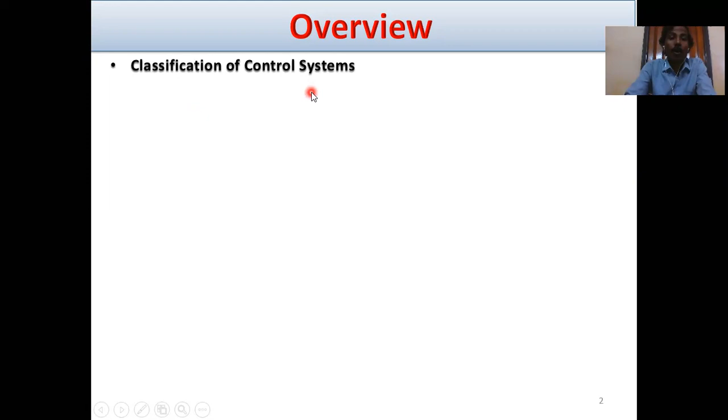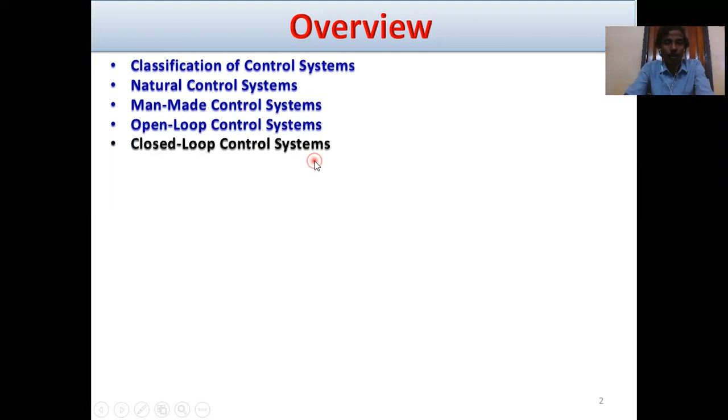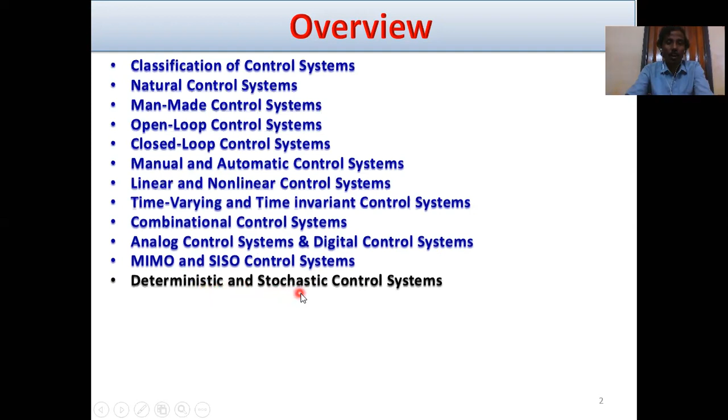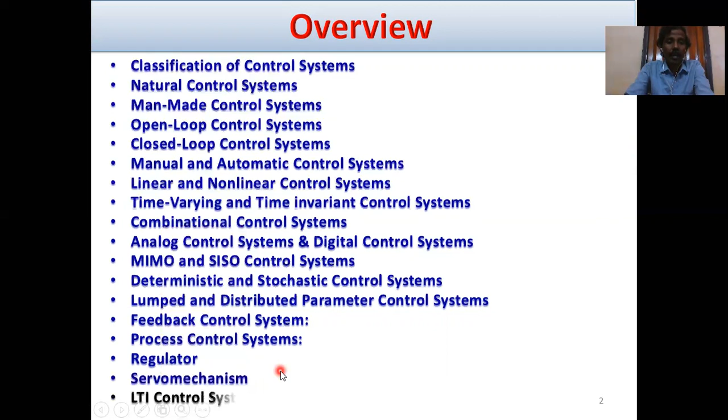Overview: classification of control systems includes natural control systems, man-made control systems, open loop control systems, closed loop control systems, manual and automatic control systems, linear and non-linear control systems, time varying and time invariant control systems, combinational control systems, analog and digital control systems, MIMO and SISO control systems (multi-input multi-output and single input single output), deterministic and stochastic control systems, lumped and distributed parameters control systems, feedback control systems, process control systems, regulator control systems, servomechanism, and LTI control systems. LTI control systems are very important.

This is our overview. Next, classification of control systems. What is the classification? Control systems are mainly two types: number one, open loop control systems, and number two, closed loop control systems.

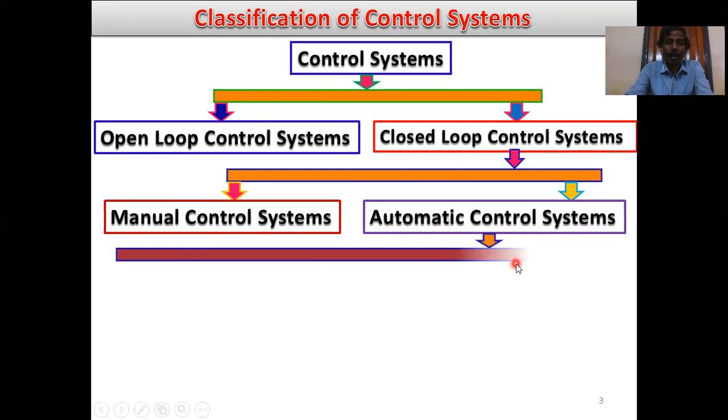Closed loop control systems are also two types: manual control systems and automatic control systems. Automatic control systems again include pneumatic control systems, electrical control systems, electronic control systems, electro-pneumatic control systems, and hydraulic control systems.

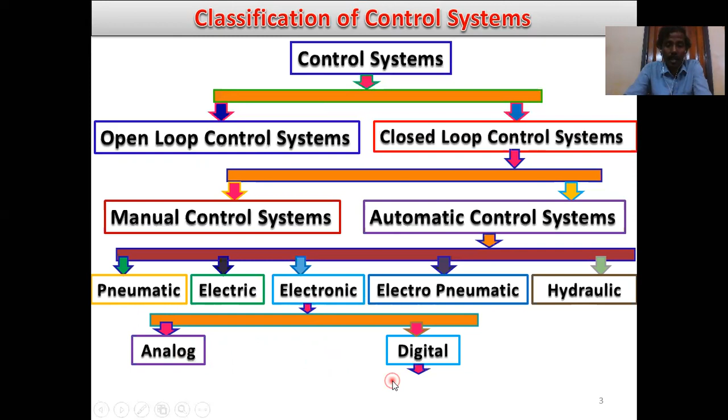Next, electronic control systems are again two types: analog control systems and digital control systems. Digital control systems include microprocessor based control systems, PLC based control systems (programmable logic control based control systems), DDC based control systems, DCS based control systems, and fuzzy logic based control systems.

So what is DDC? DDC means direct digital control. And DCS means distributed control systems.

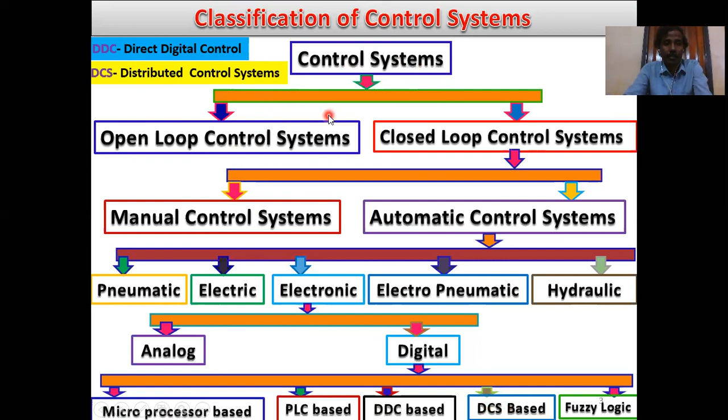So this is our classification of control systems, the first classification. And second classification of control system, that means another classification of control systems.

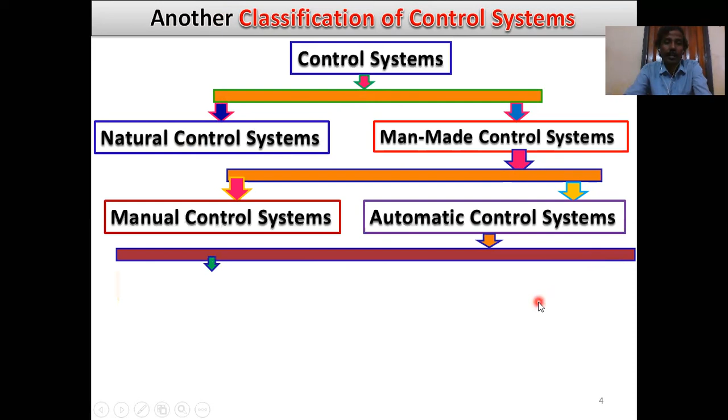Control systems are again two types: natural control systems and man-made control systems. Man-made control systems are again manual control systems and automatic control systems. Automatic control systems are again open loop control systems and closed loop control systems.

Open loop control systems are again two types: nonlinear control systems and linear control systems. Closed loop control systems are also two types: nonlinear control systems and linear control systems. Nonlinear control systems are also two types: time variant control systems and time invariant control systems. Linear control systems are also two types: time variant control systems and time invariant control systems.

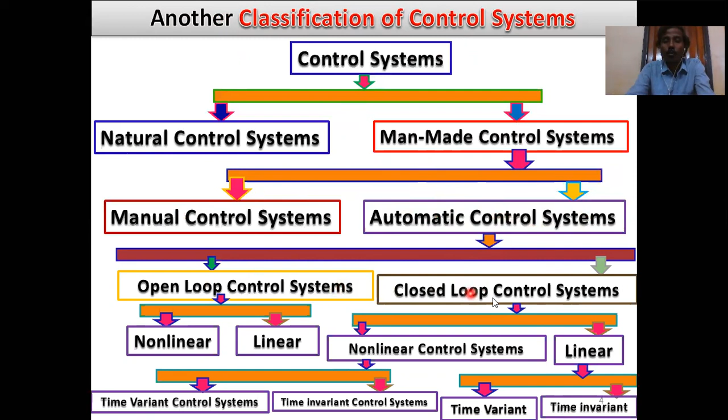This is important: natural control systems and man-made control systems, and automatic control systems. This is also very important. Automatic control systems are also open loop control systems and closed loop control systems, or feedback control systems.

So classification of control systems. Another classification of control systems based on some parameters - we can classify the control system in the following ways.

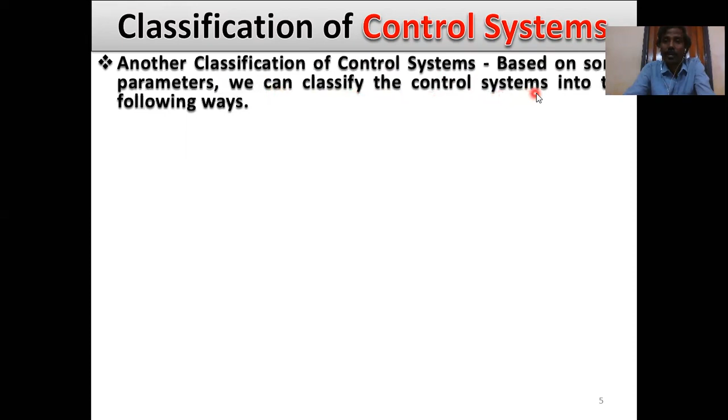What is natural control systems? The systems inside a human being or biological systems are known as natural control systems. This is a very important term - human being or biological systems. This type of control system is called natural control systems. Examples of this kind of control systems are universe control systems and human body control systems.

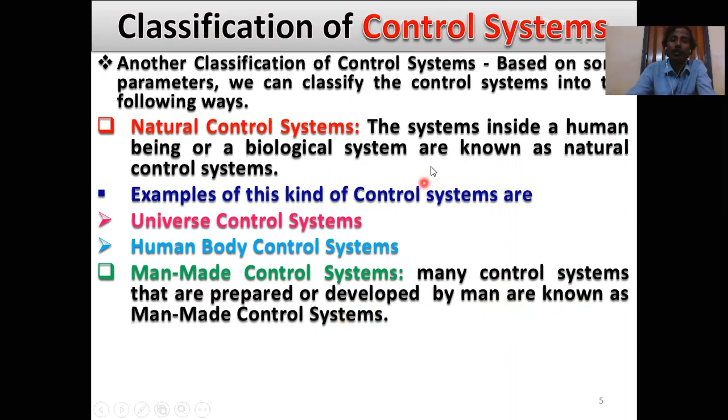Another type, man-made control systems. Many control systems that are prepared or developed by man are known as man-made control systems. This is developed by man - that's why this type of control system is called man-made control systems. This is very important, and examples of these control systems are vehicle type control systems and aeroplane control systems, etc.

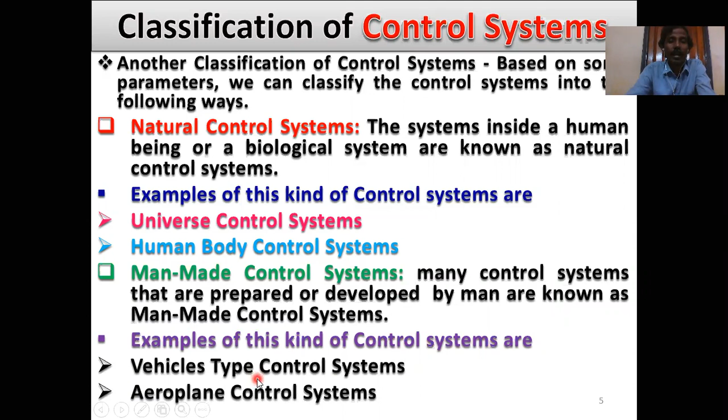So natural control systems and man-made control systems. Again, what is open loop control systems? Open loop means no feedback path, just input corresponding to output. So what is open loop control systems?

The control technique in which the calculated or estimated amount of energy is supplied to a process plant according to the practical experience of an operator, in order to maintain a process variable at the desired value, without receiving any feedback information about the actual value of the variable in the process plant. This is without receiving any feedback information - this is very important, without feedback. That's why this type of control system is called open loop control systems.

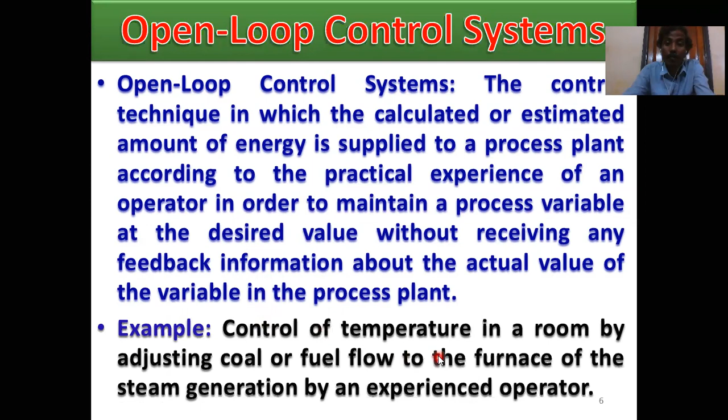What is the example of open loop control systems? Control of temperature in a room - this is the example of an open loop control system, by adjusting coal or fuel flow to the furnace of the steam generation by an experienced operator. So this is our example: room temperature by experienced operator, using coal and fuel flow.

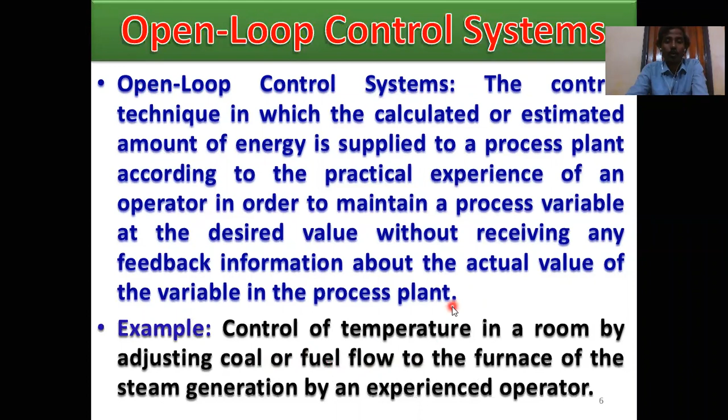Next, the block diagram for open loop control systems. First block: coal supplied by the experienced operator according to deviation of room temperature from the desired value. So coal supplied by experienced operator - this is also very important, because in this case there is no feedback, only ideally coal supplied by an experienced operator. Suppose our required room temperature is 25 degrees centigrade - the experienced operator supplies the coal for 25 degrees centigrade.

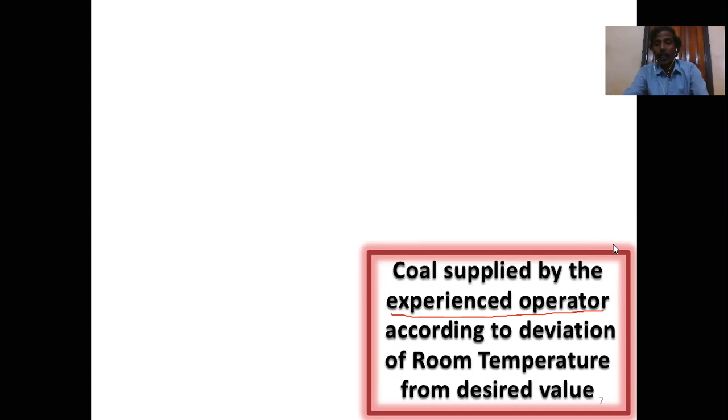Next block, furnace or heating systems. Coal burns and boils the water in the boiler drum. This is the boiler section, controlled by water, and storage steam unit. Then steam flow to the room, our required room temperature, suppose 25 degrees centigrade. So this room is being heated, but there's no information feedback, so the ultimate temperature could be 25, 24, or 26 degrees centigrade, because there's no feedback in between the input and output section.

No feedback information - that's why this type of control system is called open loop control system. This is the exhaust steam. So the experienced operator supplies the coal, the furnace burns the coal, the boiler produces the steam, this is the steam storage unit, and this steam heats the room. This is the open loop example.

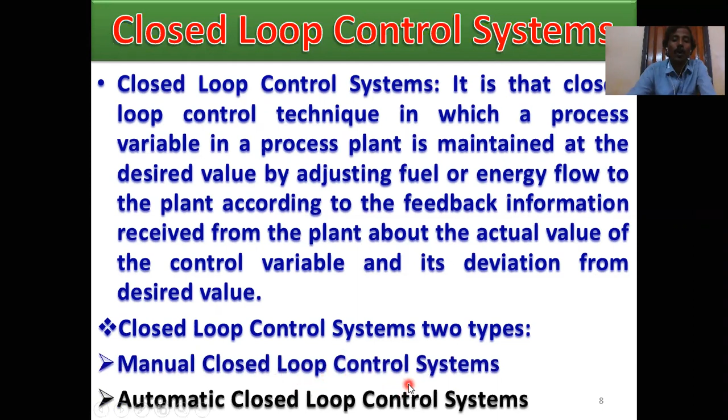So this feedback information is very important, this is required for closed loop systems. This is the feedback information. What is the example? Closed loop control systems are mainly of two types: manual closed loop control systems and automatic closed loop control systems. These are practical examples. What is the block diagram?

This is the reference input or set point. This is comparator, or summing point, or regulator. This is the error signal - error signal equals reference input minus feedback signal, this signal minus this signal. And this is the amplifier.

Amplifier output is controlled by the controller, and controller output signal controls the exact plant or process. This is very important, because the controller section controls the plant. So this signal ultimately controls the process or plant section, and the process output or plant output ultimately is the controlled output signal. This is the feedback path. Feedback may be positive or negative.

So controlled output divided by controlled input is called the efficiency of the system, or transfer function of the system, if all initial conditions are zero. This efficiency is always less than 1. If it's 90% and above, up to 98%, this is a perfect system or high efficiency system. So these are practical examples of closed loop control systems.

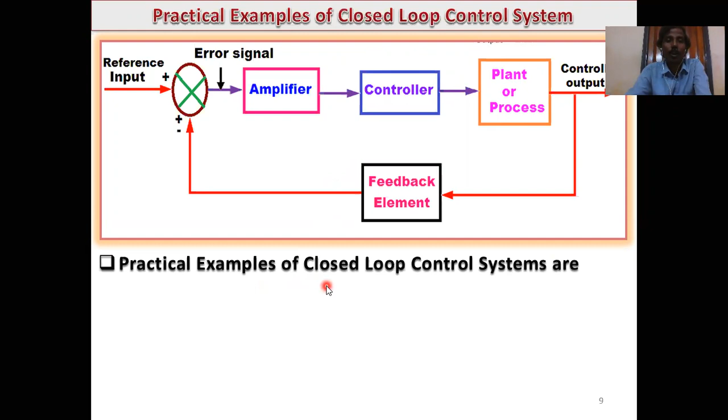What are the practical examples? Automatic electric iron, water level control, servo voltage stabilizer, air conditioner, cooling system in a car, missile launch and auto-tracking by radar. These are our examples of closed loop control systems.

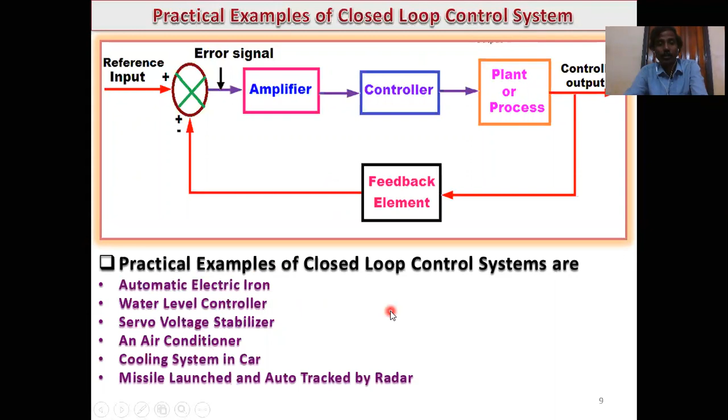Then manual closed loop control systems - what is it? This is also important: it is that closed loop control technique in which a process variable in a process plant is maintained at the desired value by adjusting fuel or energy flow to the plant with the help of an experienced operator, according to the deviation of the process variable from the desired value. So this is controlled by an experienced operator according to the deviation of the process variable - this is the important sentence. That's why this type of control system is called manual closed loop control system.

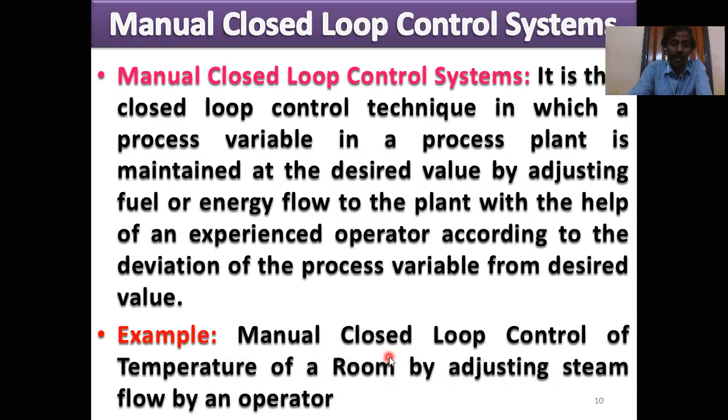So what is the example? Manual closed loop control of temperature of a room by adjusting steam flow by an operator. So room temperature control, this is also a manual closed loop control system. What is the block diagram?

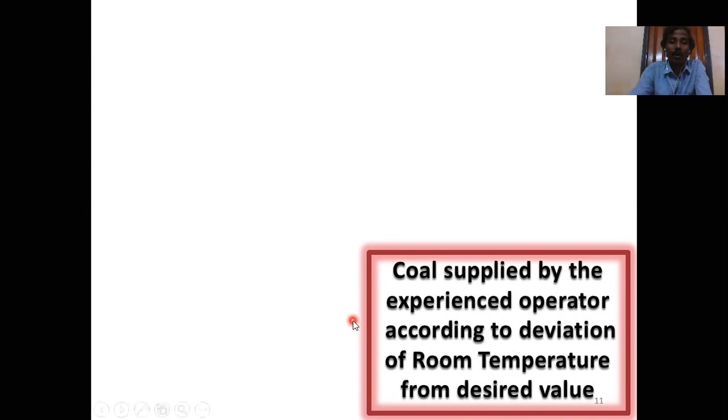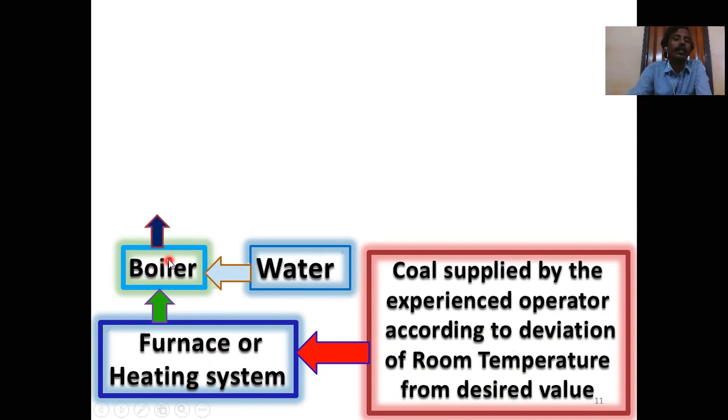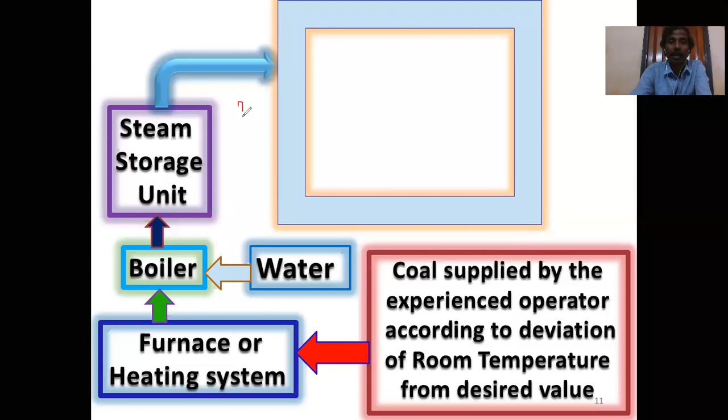Again, this is the first block: coal supplied by the experienced operator according to deviation of room temperature from the desired value. So the experienced operator supplies coal to the furnace and heating system. The coal burns, this is the boiler section controlled by water, and this generates the steam storage unit, which controls the room temperature. This is our room - suppose again our required temperature is 25 degrees centigrade.

Then steam flows, after steam flow the room is being heated, and this temperature may be 25 degrees, or less than 25 degrees, or greater than 25 degrees. So the telephone operator sends information about the actual temperature of the room, and vice versa. This is the exhaust steam section.

So this is our closed loop control system, because the experienced operator supplies the coal, and this coal burns in the furnace, and the boiler section is controlled by water, and this steam storage unit - the steam controls the room, and the room is being heated, and this information is sent by the experienced operator. This is the experienced operator section, and this is the exhaust steam.

This section is exhaust steam. This is the exhaust steam.

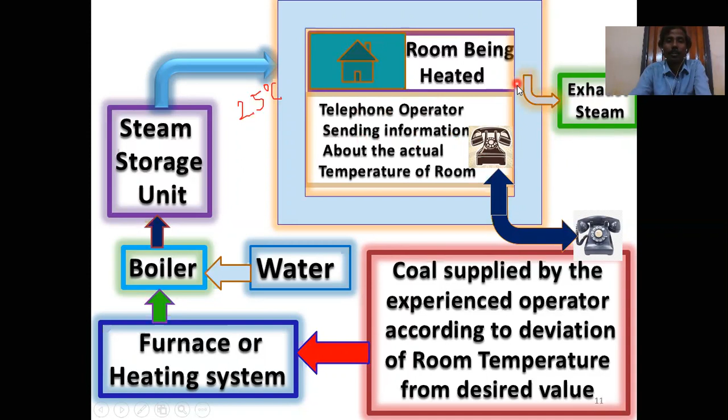So this is our closed loop manual control systems examples.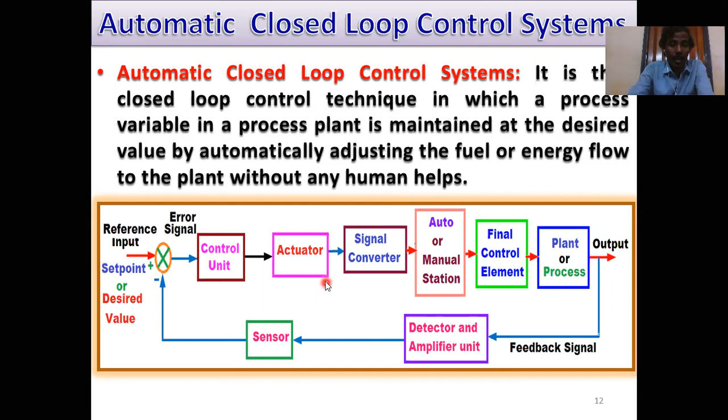So this is the block diagram for automatic closed loop control systems. This is the reference input and set point or desired value. This reference input may be step, ramp, parabolic, impulse, sinusoidal, discrete, analog, any type of input you can apply. And this section is the comparator section or summing point, and this is the error signal. Error signal means reference input minus feedback input. This signal is the input of the control unit, and control unit output signal becomes actuator input signal. Actuator output signal goes to signal converter, and this signal converter is ultimately for automatic control.

This is the auto system. If this is manual, then it's used by or controlled by manual station. So in this section, this is the auto section.

And final control element, this is the final control element. That means this is the exact value for plant or process input magnitude. This is the process or plant, and after operation, this is the output, and this output feeds back, and this feedback goes through signal detector and amplifier unit or sensor. This is the negative feedback system, and output by input is called the efficiency. If transfer function definition, then output by input is called transfer function if all initial conditions are zero. So this is the block diagram representation of automatic closed loop control systems.

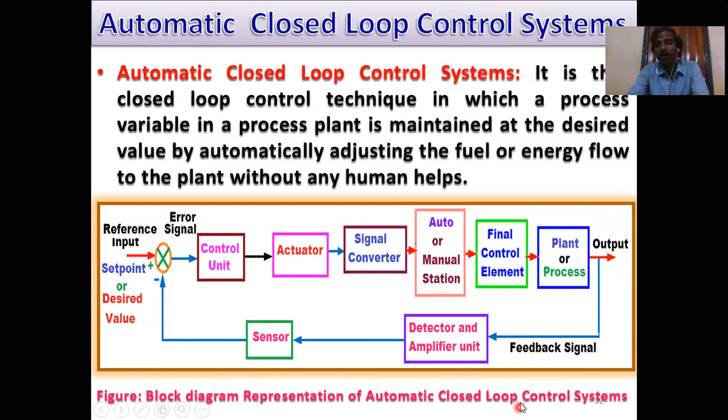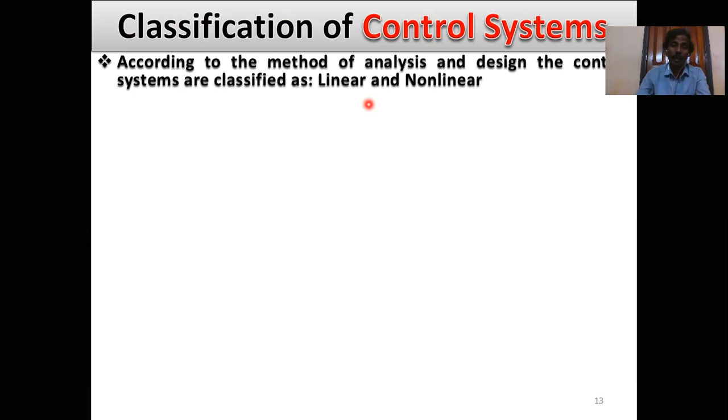Again, according to the method of analysis and design, the control systems are classified as linear and nonlinear control system. This is very important in our life, because what is a linear system or what is a nonlinear system, this basic idea is required for every engineering student.

Linear control systems. What is a linear system? A control system is called linear if it satisfies the additive property as well as homogeneous property. So if it satisfies additive properties and homogeneous properties, then this type of control system is called linear control system.

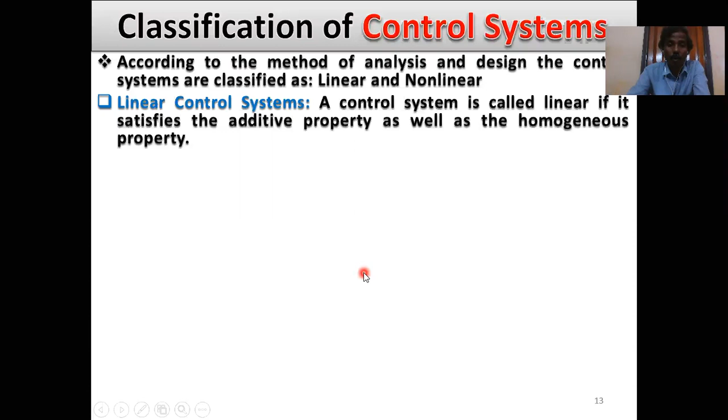So what is additive property? Suppose if x, y, and z be the domain of the function f, function of x plus y plus z, then we can write f(x+y+z) equivalent to or equals to f(x) plus f(y) plus f(z). This is the additive property.

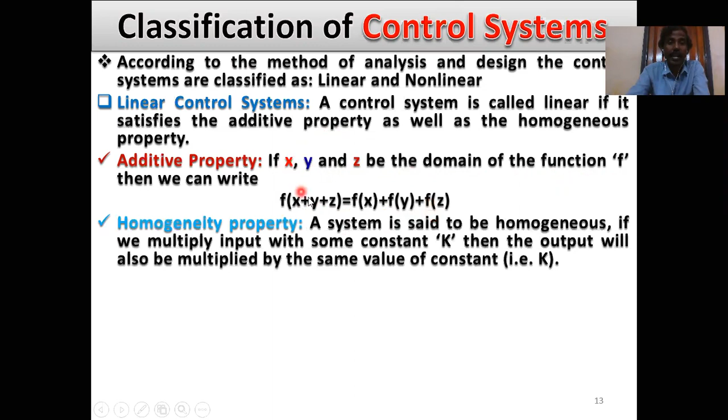And what is the homogeneity property? A system is said to be homogeneous if we multiply input with some constant k, then the output will also be multiplied by the same value of constant k. Suppose f(kx), this k multiplied into x, so the output is k into function of x. This type of property is called homogeneous property.

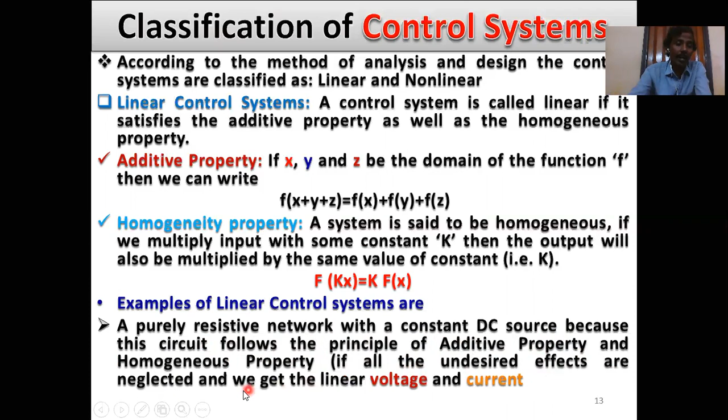Homogeneity property, homogeneous property. Example of linear control systems are a purely resistive network with a constant DC source, because this circuit follows the principle of additive properties and homogeneous properties. If all the undesired effects are neglected, we get the linear voltage and current. So this is the example of linear control systems.

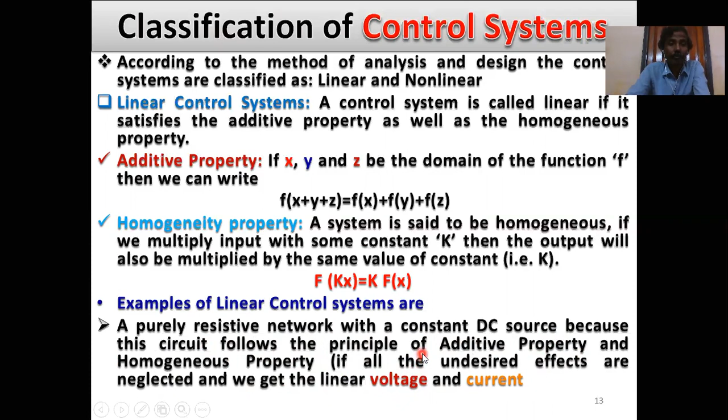Then what is nonlinear control systems? A control system is called nonlinear if it does not satisfy the additive property as well as homogeneous property. So nonlinear control systems do not satisfy the additive properties and homogeneous, that means it does not satisfy the superposition formula. So this is our nonlinear control systems.

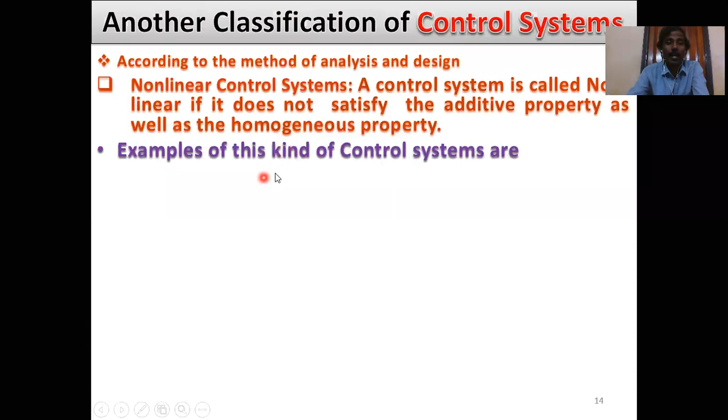Examples of this kind of control systems are thermostat controlled heating systems, on-off control systems, saturation control systems, dead zone control systems, hysteresis control systems, backlash control systems. These are all nonlinear control systems examples.

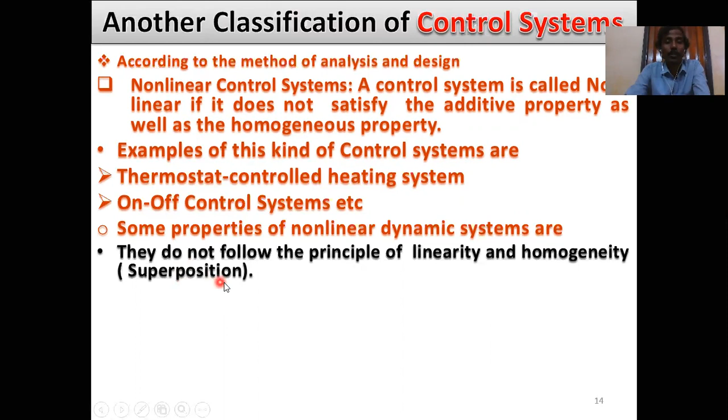Some properties of nonlinear control systems: they do not follow the principle of linearity and homogeneity, that means they do not follow the superposition formula. They may have numerous isolated equilibrium points, which is very important. They demonstrate properties such as limit cycle, which is also important.

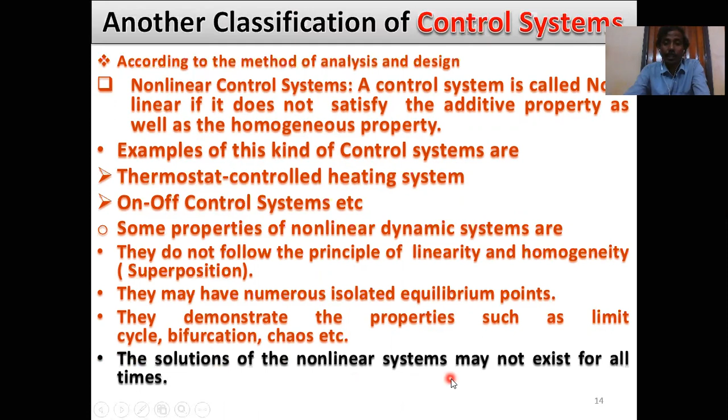And the solution of the nonlinear system may not exist for all times, and this is also an important point.

Another classification of the control system is according to the objective control. What is the classification? Single input and single output control systems.

If a control system has one input, suppose this is our control system, and this control system has just only one input and only one output, so this type of control system is called single input, single output control system. Example of this kind of control system: temperature control, position control, etc.

Multi-input, multi-output means if a control system has multiple inputs and multiple outputs, then the control system is called multi-input, multi-output control system, that means n number input, n number output. This type of control system is called multi-input, multi-output system.

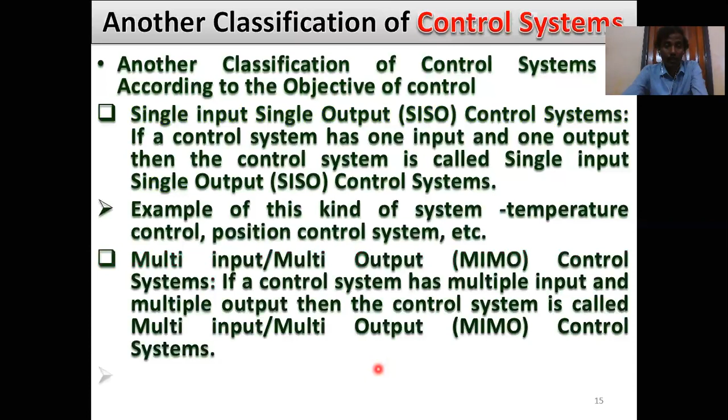Example of this kind of control systems: PLC type systems, or programmable logic control systems.

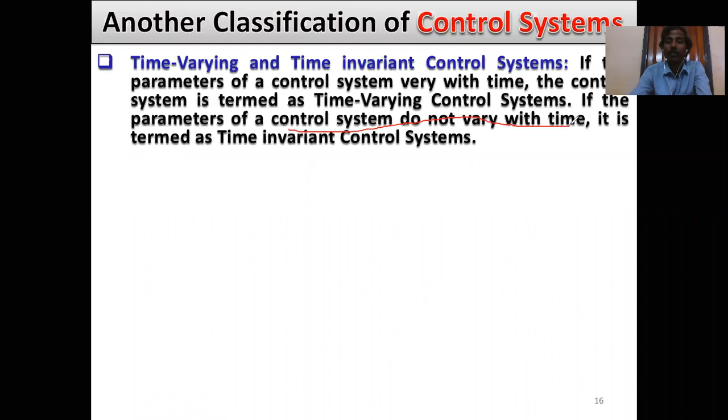Another classification is time varying and time invariant control systems. What are time varying control systems and what are time invariant control systems? If the parameters of a control system vary with time, the control system is termed a time varying control system. And if the parameters of a control system do not vary with time, it is termed a time invariant control system.

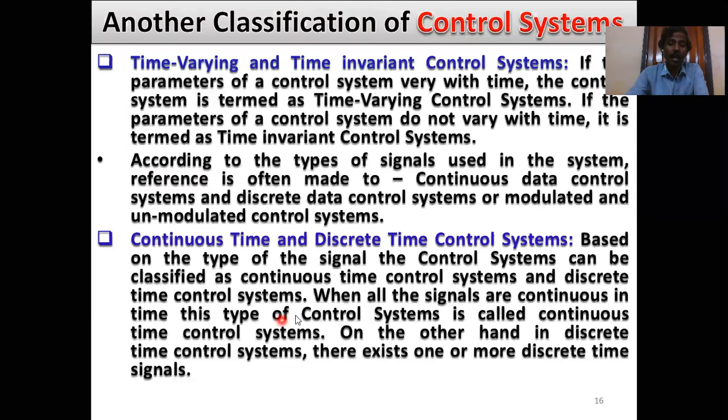According to the type of signal used in systems, reference is often made to continuous data control systems and discrete data control systems, or modulated and unmodulated control systems. So, continuous time and discrete time control systems - this is also important. Based on the type of signal, the control system can be classified as continuous time control systems and discrete time control systems. When all the signals are continuous in time, this type of control system is called a continuous time control system. On the other hand, in discrete time control systems, there exist one or more discrete time signals. This is a very important part - what is continuous time and discrete time control systems?

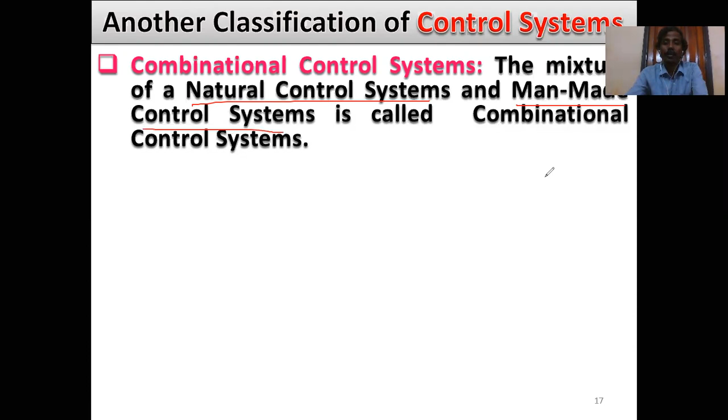Then combinational control systems - this is also important. The mixture of natural control systems and man-made control systems is called a combinational control system. For example, what is the combinational control system example? A driver driving a car is an example of a combinational control system. This is a very beautiful example because driver driving a car is a natural and man-made mixture control system.

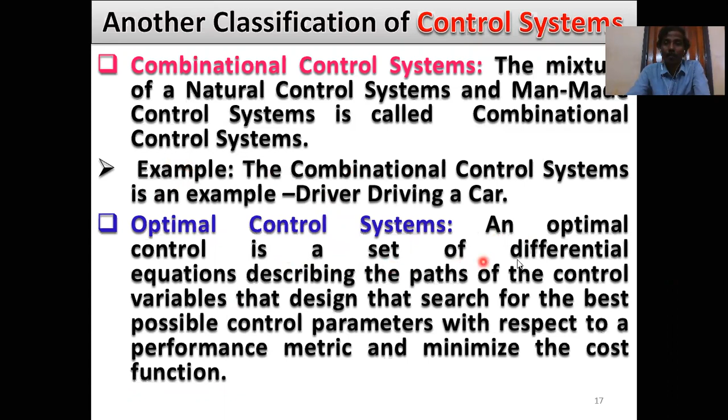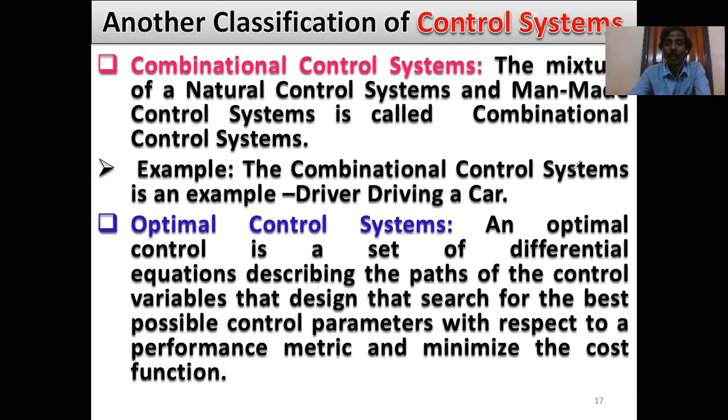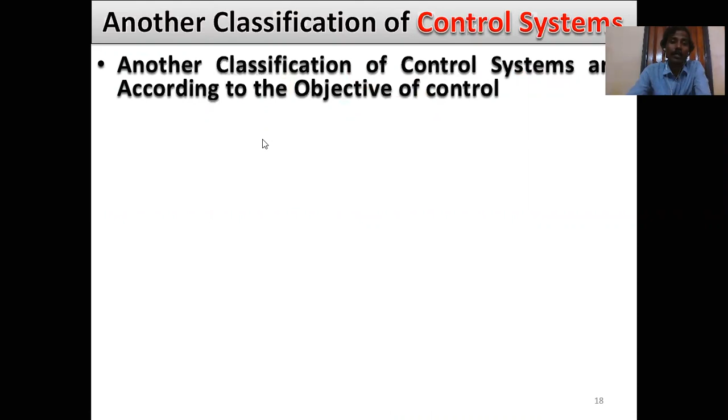Another classification of control systems is according to the objective of control. What is the name? Regulator control systems. In presence of disturbance, the controlled output value is always maintained constant or stable. It is a system or arrangement in which there is a constant steady state value for a constant input signal. This type of control system is called a regulator control system.

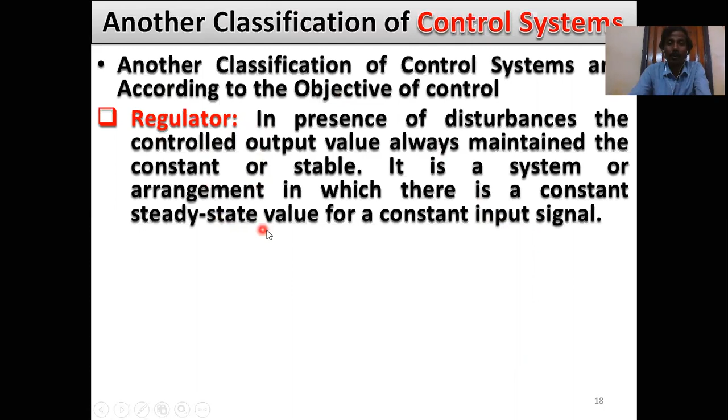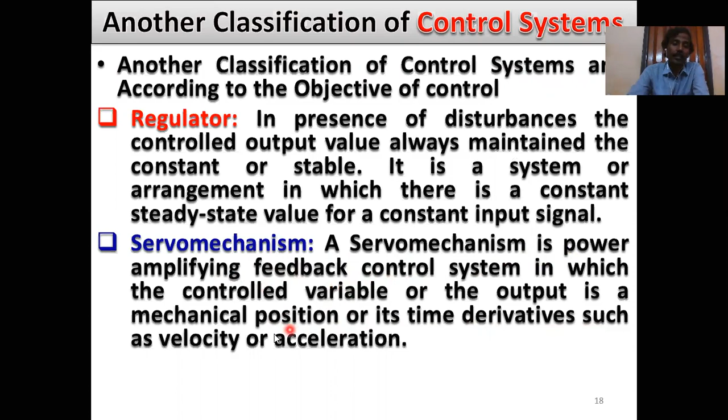Then, what is the servomechanism? A servomechanism is a power amplifying feedback control system, in which the controlled variable or the output is a mechanical position or its time derivative, such as velocity or acceleration. This type of control system is called a servomechanism.

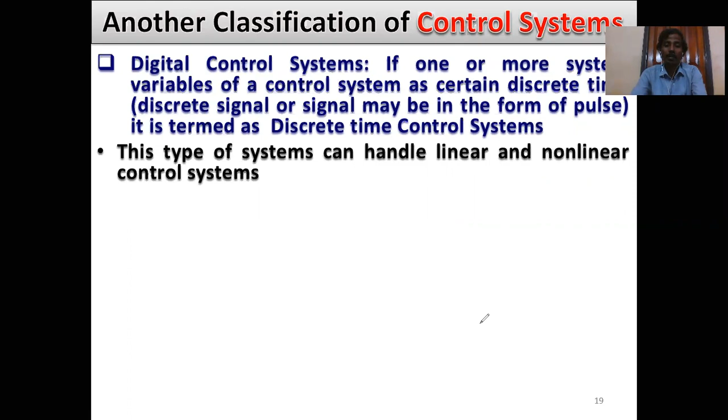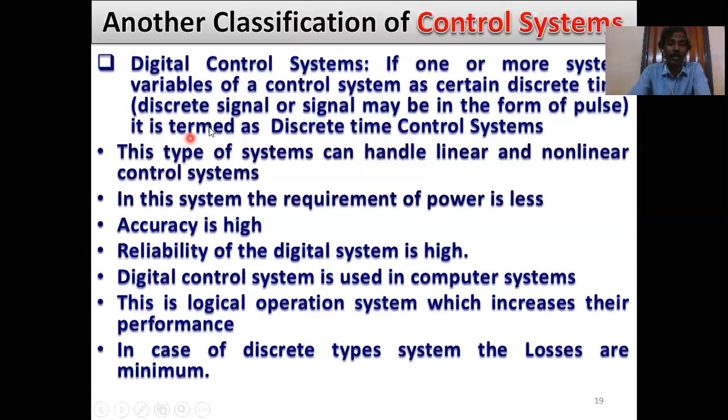This type of system can handle both linear and non-linear cases, so this is a multi-talented control system. In these systems, the requirement of power is less, accuracy is high, and reliability of digital systems is high. Digital control systems are used in computer systems. This is a logical operation system which increases their performance. In case of discrete type systems, the losses are minimum. So these are the advantages, or properties, of digital control systems.

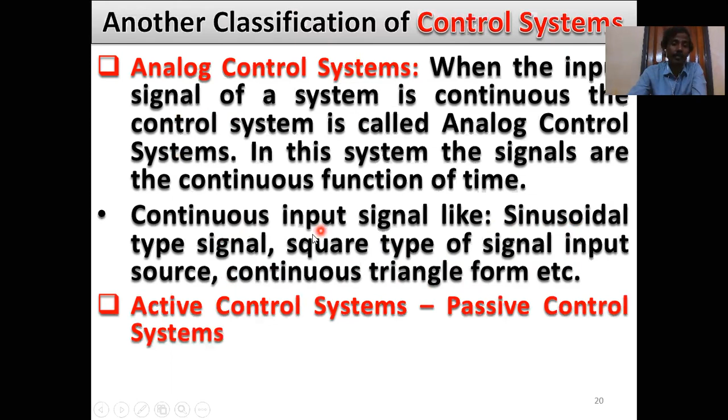Continuous input signal like sinusoidal type signal, square type of signal input source, continuous triangular form - this is an example of analog control systems. Then active control systems and passive control systems. Previously we discussed deterministic and stochastic control systems.

This is also a very important section. If the response to input and the external disturbance of a control system is not predictable and repetitive, the control system is said to be a stochastic control system.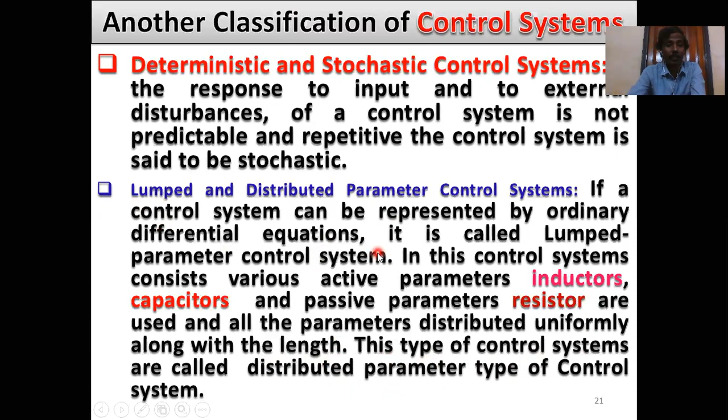Feedback control system - this is actually a closed loop control system. A feedback control system is a system where the output is fed back to the input, and whose output is controlled by its measurement as a feedback signal. This feedback signal is compared with the reference signal to produce an error signal, which is filtered by a proper controller to produce the system's control input.

Control systems are usually negative feedback systems. Oscillations are the example of positive feedback - this is very important. In general, we use the negative feedback system in maximum cases, and the positive feedback example, oscillations, is the example of positive feedback control systems.

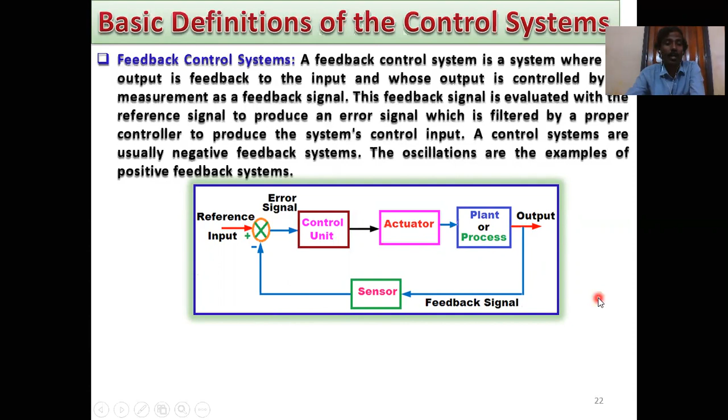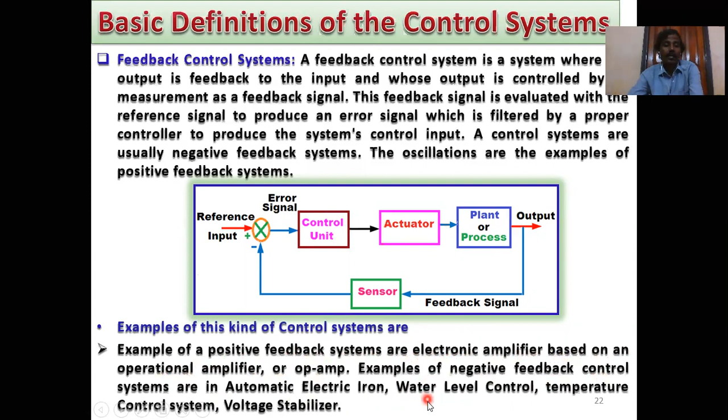Example of positive feedback systems are electronic amplifiers based on an operational amplifier or op-amp. Examples of negative feedback control systems are automatic electric iron, water level control, temperature control, and voltage stabilizer, etc. This is the example of feedback control system.

Next, process control systems. What is the process control system? The technique by which a process variable in a process plant is maintained at the desired value in order to obtain a better quality product at lesser cost with better safety of operation is called process control.

This is actually industrial control, so cost minimization is essential, or less cost. So again, the definition: the technique by which a process variable in a process plant is maintained at the desired value in order to obtain better quality product at lesser cost. That means low cost but high efficiency or quality, better quality of output.

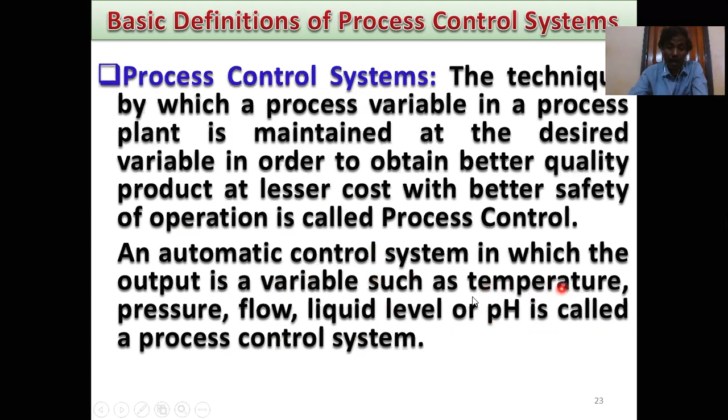So this type of control system is called a process control system. An automatic control system in which the output is a variable such as temperature, pressure, flow, liquid level, or pH is called a process control system.

Then, linear time invariant control systems - what is LTI control systems? This is our control systems classification. Control systems are mainly of two types: natural control systems, example human body, and man-made control systems, example vehicle, aeroplane, etc.

Man-made control systems are also of two types: manual control systems and automatic control systems. Manual control system example: fan, regulator. Automatic control system example: automatic electric iron. Automatic control systems are also two types: open loop control systems, already discussed, example traffic signal, and closed loop control systems, example missile. Open loop control systems are also two types: linear control systems and non-linear control systems.

Example: purely resistive network with constant DC - this is the linear control systems example. Linear control systems are also two types: time variant and time invariant control systems. Non-linear control system example: on-off control system, saturation, dead zone, hysteresis, backlash. This control system is also two types: time variant and time invariant control systems.

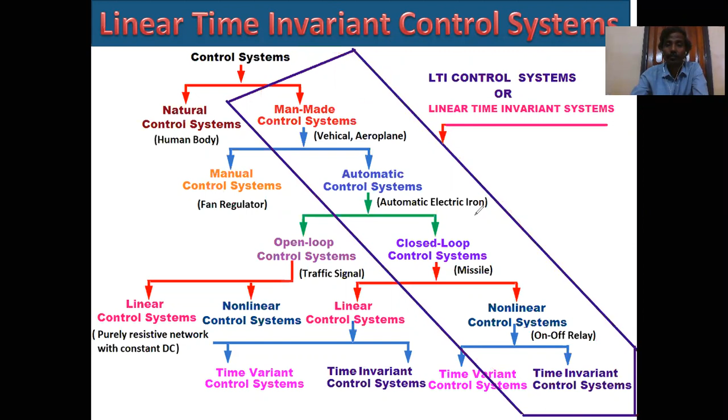This block is very important because man-made control systems, automatic control systems, closed loop control systems, non-linear control systems, time invariant control systems - these are all linear time invariant control systems, or LTI control systems. This section is the linear time invariant control system. These are all linear time invariant control systems. So thank you.